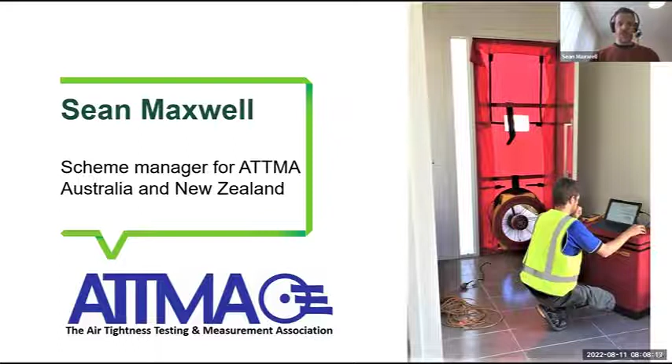ATTMA started in the UK, and now about 10 countries have joined the scheme, because they've really done a lot to sort out how air tightness testing is done systematically. So what we want to do is show you some of the things we're learning through that, and I think it'll help Australia get through some of these challenges coming.

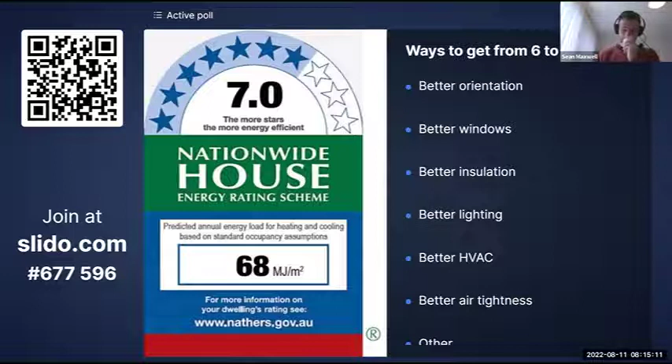Here's another quick poll. The main thing from the code for NCC 2022 is we're going from 6-star to 7-star, most likely. So what do you expect are the ways to get from 6 stars to 7 stars? Open that link on your phone, scan that code, and participate - what do you think are going to be the easiest ways to do that? Okay let's see - better orientation, air tightness, better insulation, better windows.

Interesting, better HVAC is also one. HVAC is going to be a more important way of doing things in the future, because we're going from basically the current framework, which is pretty much fabric-only approaches to energy efficiency for the NatHERS rating, to including HVAC as one of the whole-of-home components. So most of you think more insulation, better orientation, better air tightness - those would be the ways you get from 6 stars to 7 stars.

So some of the changes planned for NCC 2022, like I said, going from 6 stars to 7 stars, it's just a general increase in stringency for air tightness, or for energy efficiency. But there's also some stuff in there related to condensation - bits about when you're now going to need ventilation. If you build more airtight, you need ventilation. And there's changes to the materials you're allowed to use.

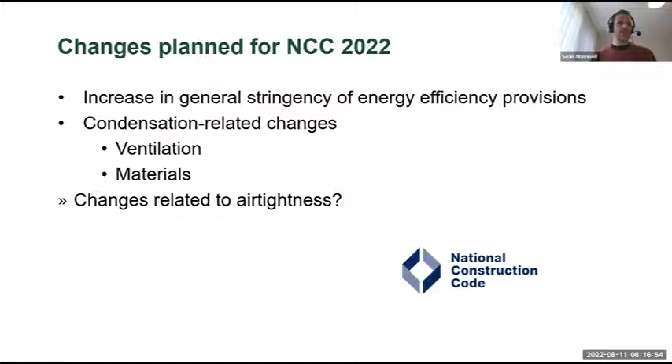So are there changes related to air tightness? Well, some of you said to get from 6 stars to 7 stars you're going to use better air tightness. Well, not yet really, because in NCC 2022 there really isn't anything in there about air tightness. But that's not to say that stuff isn't happening - I find this totally tantalizing prospect of using air tightness in your energy model to reflect how you build.

So the software you use to do a NatHERS rating currently just uses some defaults in there about how you build for air tightness. They'd say you've got a bunch of downlights and they're close fitting or well sealed, stuff like that - checkboxes of yes, it's been sealed or not, or it will be sealed. And that generates a default of maybe around 10 air changes per hour, or 10 cubic meters per hour per square meter. Using those defaults gets you to around 6 stars for a typical rating.

But if you were able to change those assumptions - like a lot of you, if you've done blower door tests before, you'll know it's not that hard to get from 10 down to, I regularly get down to 5s, say. If you do that, you're going to get almost half a star better performance that you actually can't claim credit for right now, because NatHERS doesn't take air tightness directly into account. So this is something that the Department of - actually, I'm not sure what they renamed their department now, was Department of Industry.

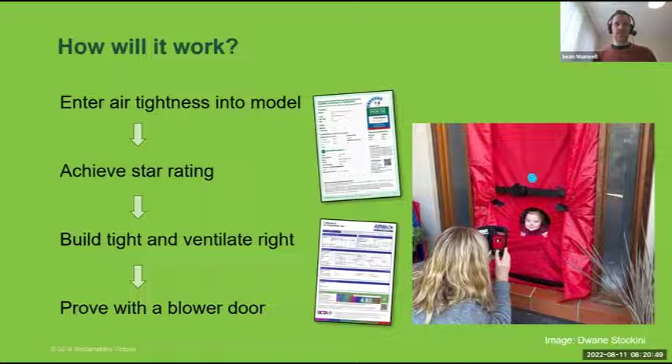I find it very exciting because as the leader of ATTMA, the Air Tightness Testing and Measurement Association, our group is made up of people who really care about building performance evaluation with a blower door. The testers who go through ATTMA accreditation are accredited - they've gone through training. The data is checked by software; when you input it into the database, it scans to make sure it actually makes sense. The testers are audited, and the market plays fair in that everyone contributes to the database. So they're all checking in all directions that things make sense.

So how will blower door test companies keep up with construction demand? The Department of Industry sees this not as something that's going to create crazy out-of-hand demand, because it's actually going to go with the number of assessments that are done this way.

Thermal bridging is a basic example - when I say thermal bridging, it's like a bridge for heat transfer to happen very quickly. How does heat get from one side of the wall to the other? If it has to go through insulation, it's going to be very slow. A thermal bridge is a bridge over or through that insulation, taking heat there very quickly. That's what thermal bridging is - it's just a thermal highway, you could say.

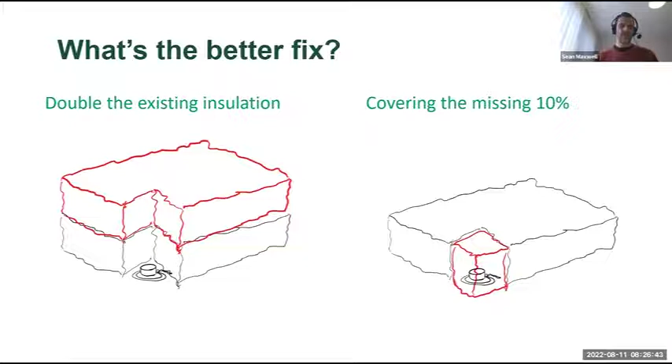So how much of a risk is that? If you're missing a bit of insulation, here's a hypothetical one. If you were to cover that missing 10% of insulation around a light fixture with insulation now, would that save more energy than doubling the thickness of all the other insulation there? If you're talking about bats of insulation, using one bag of extra insulation versus using 9 more bags to cover the existing insulation - which saves more energy?

What do you think? Real quick, let's do a poll here. What do you think is going to save more energy - covering the missing insulation so that 10% goes down to 2%, or doubling the thickness of all the insulation that's already there? What do you think saves more energy for a typical ceiling assembly? We've got 22 people eager to answer here. Awesome, so you get the point.

Missing insulation is a massive, massive penalty - that's just how the math works. I can work it out for you sometime. It's pretty crazy - insulation this thick, thicker than any insulation I've ever seen in real life around here, you could add as much as you want, and it's going to save less energy than just covering those little missing bits. So the missing bits are super important.

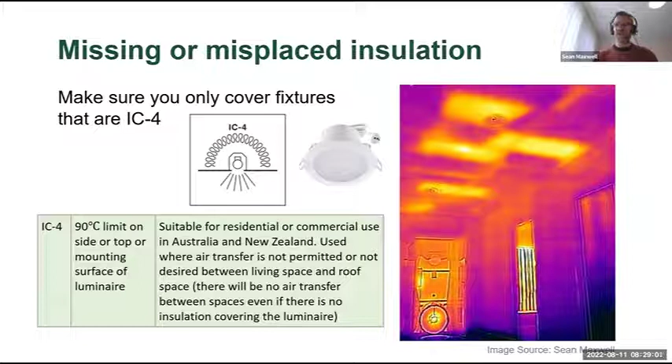That's how it should look if you do an infrared scan of your projects. Go ahead and cover them, just look on the box. This fixture here is from Bunnings. You just look at the box and it'll say what the rating is. Most fixtures these days are IC4 rated, so you can just cover them with insulation. If anyone has questions about that, I'd love to learn more about light fixture ratings, but it should be pretty simple.

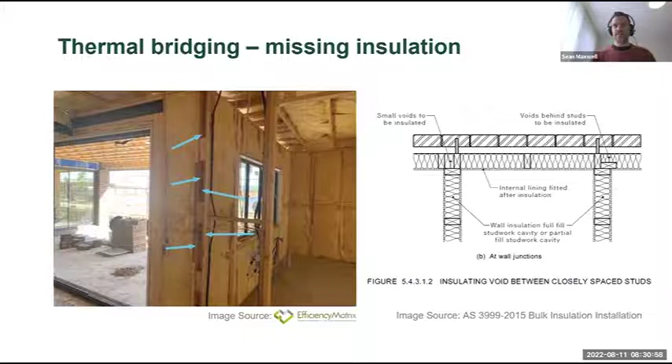All right, here's some more quick pics of missing insulation. Where the overhang comes, there's not much room to put insulation along here, but what you should do is use a high efficiency batt or a denser batt along here, around the corner. Actually, AS3999 has illustrations of how you can use high density batts along the corner, along the edge, to make up for this gap. Don't just not put insulation there, because it's going to really harm performance.

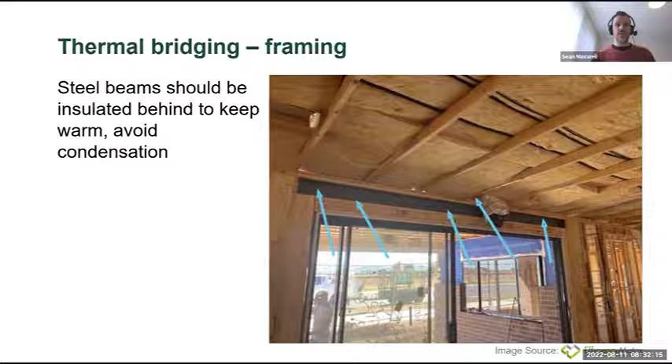Another example here is this steel beam. Steel is very, very good at transferring heat, transferring energy. So to get rid of this massive thermal bridge, this is going to light up real bright with an infrared camera. You can use even a little bit of insulation, just a thin bit of foam board insulation along there, to cut off that thermal highway from inside to outside. Some thermal bridges can be so strong that they're actually locations for condensation, especially in humid environments. So these thermal bridges really have many drawbacks. Thermal bridging doesn't just have to be metal, even timber framing has a big impact on this. This is accounted for directly in energy codes in the US, and I expect this to happen someday in Australia.

So with timber framing, when you talk about the insulation value in your wall, it's not just the value of the thickness of the insulation, it's not just R2 or R3 insulation that you're using in your wall. The timber actually is part of that assembly, it's part of the thermal performance. So just standard timber studs in a 90 millimeter wall presents a 15% loss in performance from the insulation R value—it's 15% worse than R2 insulation, for example.

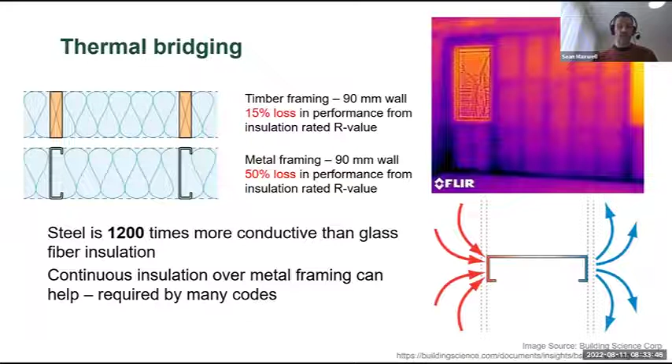Metal framing, though, is a way different story. That same wall assembly is 50% worse than the insulation R value. So if you put R2 insulation in a wall using metal studs, it actually behaves more like R1, which to me is just crazy how efficient these metal studs are at transferring heat between inside and outside—1,200 times better at transferring heat than glass fiber insulation. That's why in a lot of codes abroad, they require that if you use metal framing, you have to use some continuous insulation over it.

We don't need to go too far into different kinds of insulation available, but expect more options as time goes on. There's lots of different ways to do it. Closed cell and open cell spray foam are very widely used in the US. By far, glass fiber is still the most common insulation in the US, but they're using much more spray foam too. A combination of glass fiber and continuous board insulation like XPS on the outside is a super common assembly in the US. Expect similar stuff coming this way.

Before I get on to this, there are a couple quick questions here. What are the cost implications of a blower door test?

Generally, the market rate for a basic blower door test—for a lot of testers, if you're a builder building many homes and wanted to know how you're doing, a lot of them would give you a complimentary blower door test, for the possibility you might use them for all your future projects. So it's worth asking. But market rate would be definitely less than $500 in a mature market. I think it's common for a blower door test in the UK, where it's required by code, to be about 180 pounds or so—a couple hundred dollars, maybe $300 Australian. That's in the UK, and it's probably similar in the US.

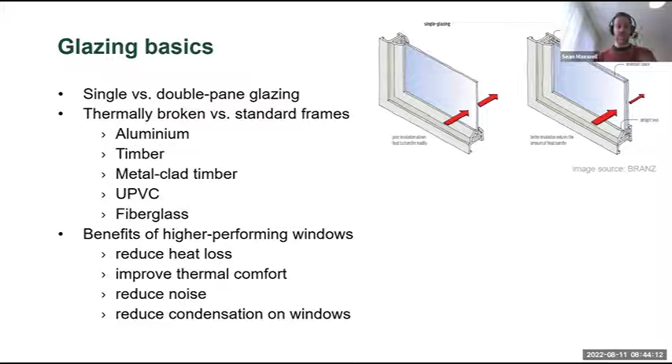Double glazing also reduces noise transfer and reduces condensation potential, and that goes for the framing as well. The better performing framing, fiberglass, UPVC, is better at avoiding condensation than aluminium, which is really a good condensation surface. It's actually sort of ironically a dehumidifier in itself because so much condensation collects on it, it dehumidifies the air. So condensation, boo.

I'll go over the main difference between that apartment and this apartment. There's a difference of 100 years in when they were constructed, but that one's single pane glazing, and this one's single pane glazing. That one is uninsulated masonry walls, and this one is uninsulated masonry walls.

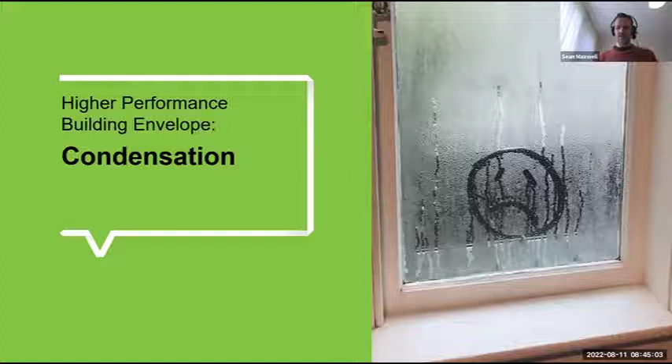Why do we get condensation in that building in Bondi where we don't get it here? Not because of the location, it's because of one very simple thing: ventilation, which I'll go over.

So, okay, wake up, do a quick poll here. What do you think? Is increasing the energy efficiency of homes also going to increase the risk of condensation? Are we in for a soggy awakening here?

So many think it will increase the energy efficiency, will increase the risk of condensation. Some think no, it's not gonna. I'd say if I were to answer this along with you, I'd say it depends. Yes, I would say it does increase the risk of condensation, but there are ways to mitigate that risk. If you use those methods of mitigating risk, it's actually not that scary. So we'll go over how to mitigate those risks.

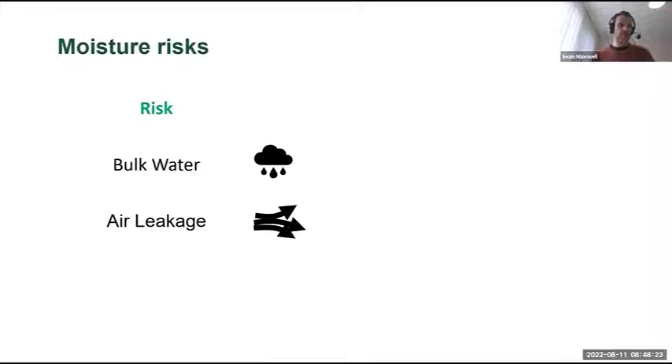So let's go over ways to mitigate these risks here. Moisture risk is the one thing that's enemy number one for buildings—it's the most basic thing. You don't want rain falling on you while you're sleeping. Bulk water is the main moisture risk. Next, air leakage is a huge moisture risk that you can take some basic steps to mitigate. And then vapor diffusion is one that the building code has started to address through materials choice. We'll go over these in terms of how they're a risk and how we mitigate that.

In terms of importance, you'd say vapor diffusion—let's just say that's a risk of one drop worth. Well, there are studies and experiments to show that air leakage can have literally 100 times more moisture transport capacity than vapor diffusion through solid materials. And bulk water, I just picked a random number here—I said yeah, it's like 1,000 times more important. Without proper bulk water management, you're 1,000 times more at risk of moisture damage.

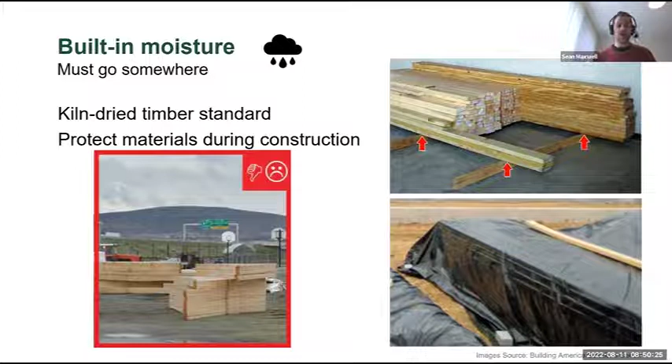The biology of mold is that it's going to start digesting your building materials, your timber, above about 19% moisture content, so it's easy to check if you have moisture in your construction. Here's a job site in Queensland that was totally unprotected from rain. I understand that will happen during construction, but if you find that there's more moisture content, rent or buy a blower once you get the roof on to dry that place out before you put linings on. In fact, it's better to do that before you put insulation in, because the insulation prevents drying. So you want to dry that timber out before you enclose it. That should be a requirement.

When I was doing a blower door test, I had my infrared camera and I pointed it at this corner and thought, ooh, look at this. What's that very cold corner over there? Why is that lighting up so dark like that? Is there a major air leak? No air leak. What was going on?

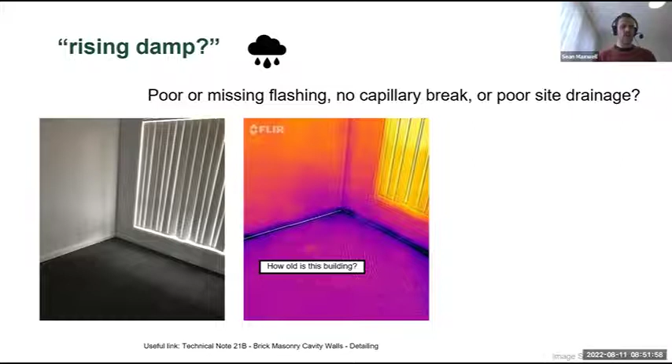I'm not saying this is rare—if you think this isn't a problem, you just aren't looking around, because this was soon after I got here in Australia, and one of the first blower door tests I did found this. It's a lot more common than you think, just some basic site drainage issue needs to be fixed to drain that out.

Brad Lawrence asks, could that also be an air leak? I confirmed it indeed was not an air leak because I went around and felt—there was no air leak. It's just the soaking from site drainage. There's lots more pictures of this site showing evidence of silting and everything. So after a heavy rainstorm, water piles up there and soaks the bottom plate. Not a good idea. Not a good scene.

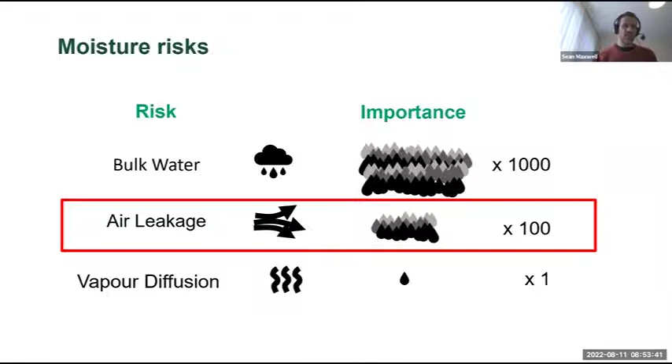So if you think air leakage is going to help dry your building out, it can often do the opposite. This is sort of an extreme example here, but it will prove the point.

Here's a swimming pool that had a very expensive HVAC system they just couldn't get to work right—couldn't get the target humidity in the aquatic center where it needed to be. They did a blower door test. You can see the guy here wiping sweat from his forehead. It was so humid in there, there was condensation on these nice double pane windows here in the Melbourne area.

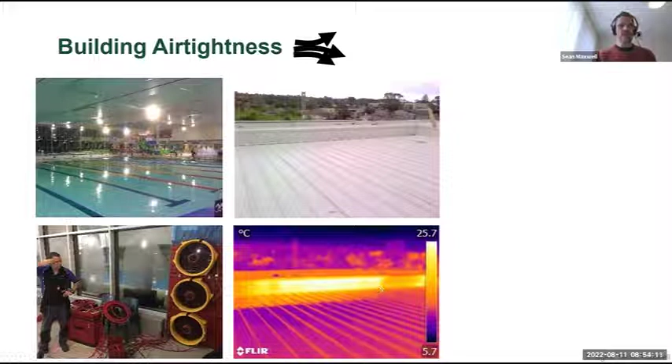And there's basically no insulation in here—no insulation and very poor air sealing. So there's tons of air leakage coming through from below, going up into this parapet assembly and causing major condensation. They're also using the wrong materials here—this is a vapor permeable wrap in this assembly, which is not the right place to be using it, and it wasn't even sticking well. Not a good scene at all.

There's just literally buckets of condensation happening in this roof parapet, and this place is only a year old and it's already getting mold and mildew in it. There shouldn't be anything in there. The food source for this is just the dust that blows in from around, and with enough moisture, the fungus starts eating it. So air leakage is the source of this water vapor. Air leakage can carry major moisture risk, not just for a swimming pool, but for your own buildings as well.

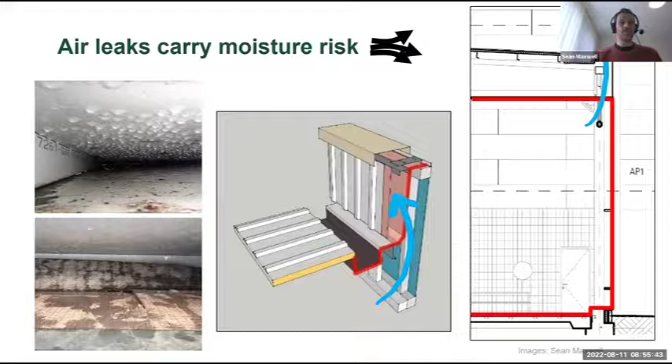Totally fine, but to avoid mold in your walls, you need to make sure there's plenty of pressure relief. These force humid air down into the building, and that needs a free path out. You don't want that humid air going into your wall assemblies, because it can collect there and cause major damage. So pressure relief by design, and then absolutely attend education about that. They can't be lazy about it. They really do have to do it like it's designed. They need to open the windows so it has a place to go, not into the walls.

In this case, it should be a code requirement. If you use evaporative coolers, you have to seal the heck out of the walls so that moisture can't get into the walls. You want it going out the windows, straight outside, provide that cooling and go outside, not collecting in your walls. So airtightness in this case would be a very good thing.

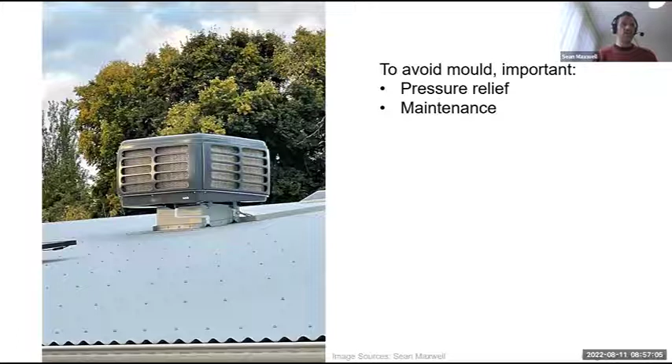If you're going to play with water, know that it can soak you. Here's another bit about air leakage, energy, and comfort.

Most evaporative coolers get fitted with gravity dampers. They just force open under air pressure, and then they fall closed by gravity. But motorized dampers are required in the building code in the US, and hint, hint, will be required here in Australia someday, so that if you use an evaporative cooler, it needs a motorized damper to force it closed, so there's not just gushing energy throughout the year. Every time the wind blows, those things can flap open and waste lots of energy. So a motorized damper should be required by building code.

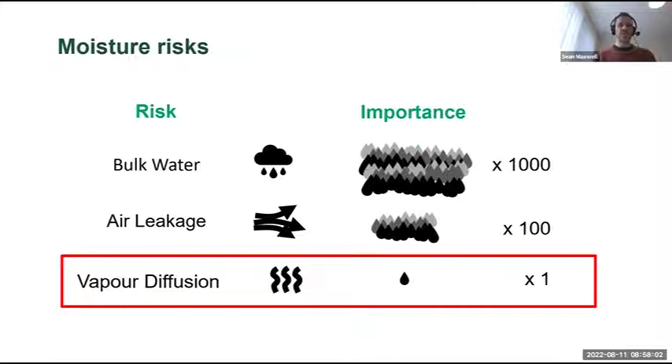So for building code, there's a standard for this. It's called AS 4200.1, and that has a classification for these materials: class 1, class 2, class 3, class 4. Class 3 and class 4 are permeable, class 1 or 2 are impermeable. So you can make something semi-permeable or impermeable. You can make it more permeable by poking little holes in it.

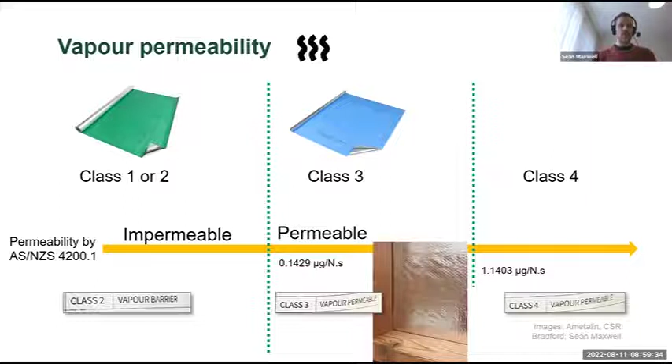If you look real close here, you can see little holes poked in the membrane by the manufacturing process. That's how they make it more permeable, they poke holes into it. So when you poke holes into this foil membrane, it lets a little more water vapor out. That's one way of achieving that end.

The other way of doing it is by making a fabric material. This is basically how the rest of the world does this, using a material that lets water vapor pass through it. It doesn't have to be a new plastic thing. In the US, it was very common to use building paper, which is a paper impregnated with asphalt, and that actually lets water vapor molecules pass through, much like a Gore-Tex jacket for your house.

So these metrics here are in micrograms per Newton second. I know you all think of it in those terms, but luckily it says on the membrane packaging what class it is, class 3 or class 4 for vapor permeable.

Let's talk about how this matters for you. NCC 2019 says in climate zones 6, 7, and 8, which include Melbourne, you need a class 3 or class 4 membrane, meaning vapor permeable.

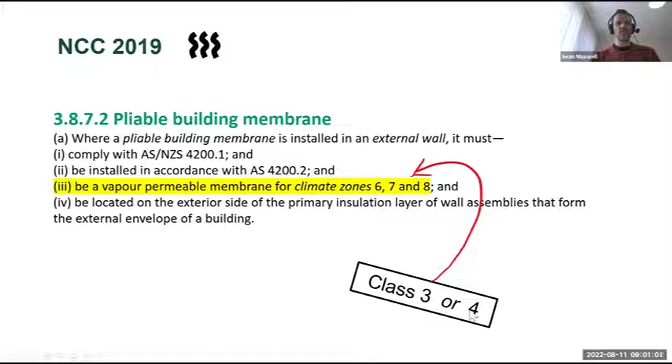Now, remember I said codes creep? We start with class 3 or class 4 allowed in climate zones 6, 7, and 8. In 2022, it says for climate zones 6, 7, and 8, now you can only use class 4, you can't use class 3 in those climate zones anymore. So that foil membrane with holes poked in it, you can't use it in climate zones 6, 7, and 8.

So in climate zones 4 and 5, you can use a class 3 membrane. Can you use a class 4? Yes, it needs to be at least as permeable as class 3, and class 4 is more permeable. So starting in NCC 2022, wraps have to be more permeable and in more climate zones.

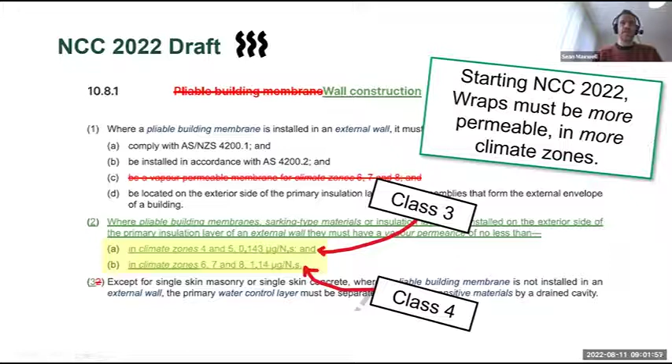So remember I said codes creep? Know that these sorts of requirements are coming, and they're just going to get more widespread over time, because that's the way the science should lead us, and that's how it's going to go long term.

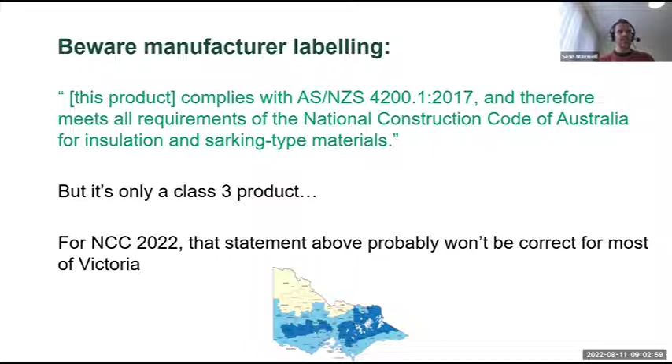So sometimes you'll see material packaging that says stuff like this: this product complies with AS 4200.1 and therefore meets all requirements of the National Construction Code of Australia for insulation and sarking type materials. But if it's only a class 3 product, that means that for most of Victoria, it's not actually going to be allowed. So even though it says it on the package, you've got to check the labels.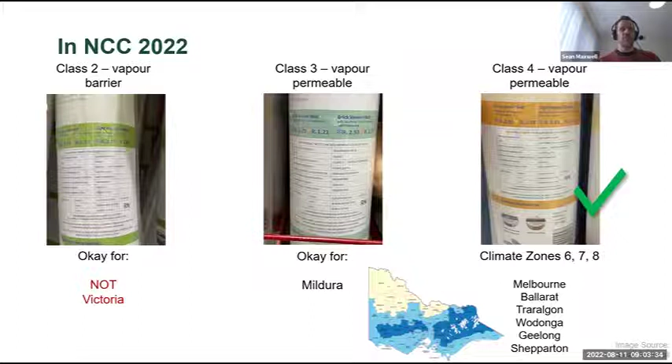So just looking on the shelf in Bunnings, you can see they have some class 2 ones, class 3 ones, class 4 ones. So some of them are going to be usable in most of Victoria and some are not. So check the classification.

Here's the shelf in Bunnings where there's some class 4 membranes there. All these requirements I'm talking about here are for wall membranes, not ceiling membranes. You can see in this picture, this one's wrapped on the wall, this one's wrapped in the ceiling. So can you buy these? Absolutely. Could you use them in a roof? Absolutely, if it's class 2 or class 3, yes. Those requirements I'm talking to you about are for walls only.

So here's a quick quiz for NCC 2022. Where in Victoria is it okay to use a class 1 or class 2 standard foil sarking in the walls of a home? Where can you use a class 1 or class 2 membrane? 2 smart people, 4 smart people, 7 smart people, 10. All right, so most of you have the right idea.

Class 1 or class 2, one that says impermeable or vapor barrier on that label, nowhere in the state of Victoria can you use one of those foils in the walls of a home. Nowhere in Victoria. In Mildura, that's climate zone 5, I think, you can use a class 3, it's still got to be permeable, but it can't be a class 1 or class 2 standard foil. So nowhere in Victoria can you use a class 1 or class 2 in the walls of a home for NCC 2022. Know that. Don't get stung by this, because if someone's looking and you've used the wrong thing, they might make you take it off.

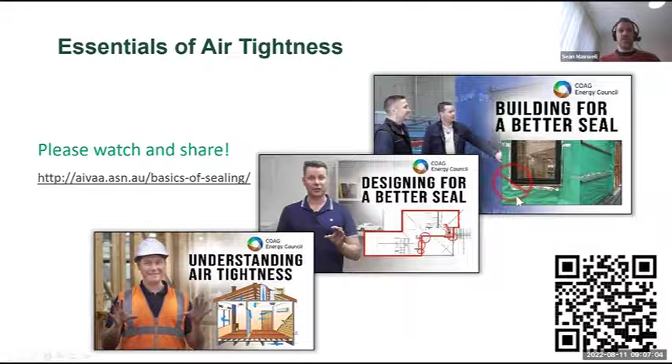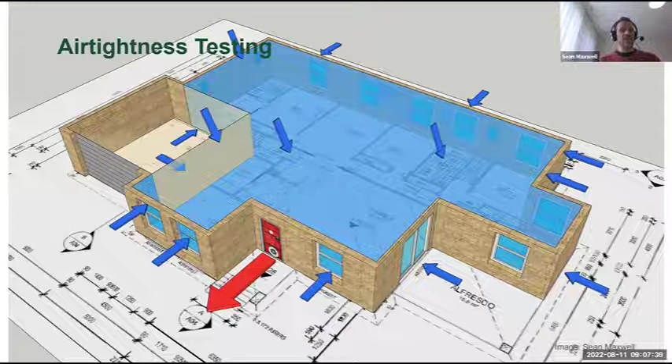Just for the walls. Okay, so when you do an airtightness test, what does it mean? Let's do an imaginary one right here. We put the blower door in the front door, sucks on the house and puts a negative pressure there, and air leaks in to replace that air that's going out from the blower door. That's how a blower door does it. It treats all leaks equally, same pressure across the whole house.

Anyone take a guess what parts of the building are actually tested by a blower door? Is it testing the walls, the doors, the windows, the ceiling, the floors? Is it testing the airtightness of the plumbing or the lights or the wall bordering the garage? Please take some guesses here. What do you think? What are we testing here?

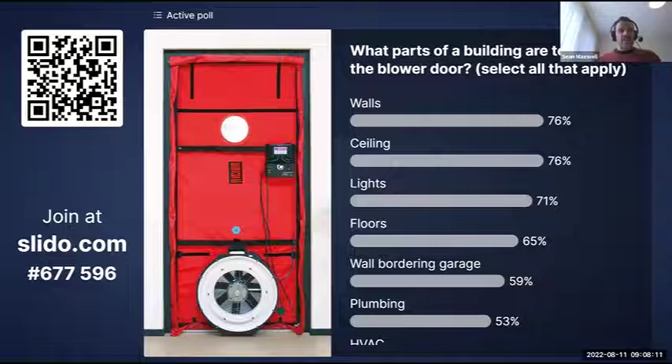So fewer of you think that plumbing is actually being tested, and maybe the wording should be more precise. The plumbing itself is not usually being tested for airtightness, but definitely the plumbing penetrations are. Same thing with - well, actually not the same with HVAC. I'll go over this point in a second. So thanks for these answers.

Yes, absolutely, walls and ceiling, those are the things obviously we think of first with a blower door. The floors, maybe less, but yes, indeed, the floors can leak. Do it on an existing building, on timber piers, and you'll see the floor itself leaks. It's like the stuff for horror movies - if you use a fog machine under a house, you'll see the fog leaking up through the floorboards. It's so cool. So floors can leak, absolutely. The wall bordering the garage, if it leaks, it's going to measure it, man, and you'll see that. And it's not good smells coming from the garage.

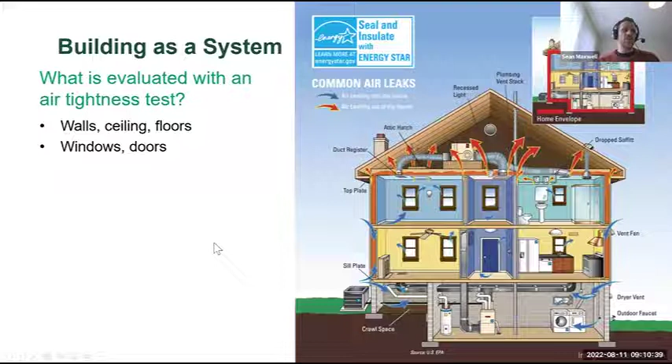So other things you might not think of, like stuff that's in the basement, it leaks into the basement, and then from the basement leaks up into the house and then out through the ceiling. You have to think of a house as a system. So yes, the walls, ceilings, and floors are leaking and going to be measured, obviously, so are the doors and windows, but plumbing penetrations, electrical penetrations, and separations from the garage, the basement - those are leakage surfaces, leakage boundaries that get evaluated with the blower door. And the HVAC itself leaks.

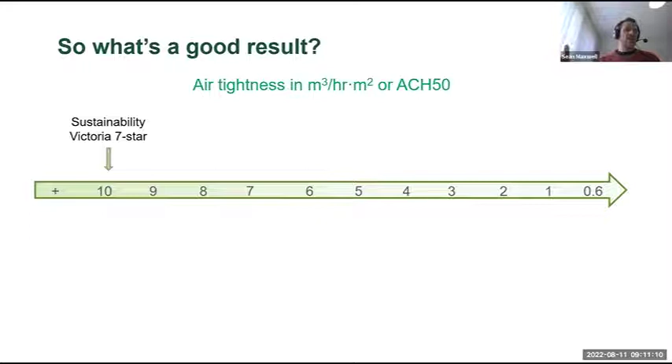So when we're talking about airtightness, what is a good result? Let's talk numbers for a second here. Sustainability Victoria says for the 7-star homes program, you need to get an airtightness of 10 or better - lower is better, so 10 or less is required. In their zero net carbon homes program, they said you need to get to 6 or less, and all of them that went through that got to that level. So where does the number 10 come from? Well, in NCC 2019, if you use a blower door to prove that you comply with the building code, you have to get less than 10 to prove that you comply.

Green Star Homes is a recently released standard for better than code homes. They say in climate zones 1, 2, 3, 4, and 6, you need 7 or less, and in climate zones 5, 7, and 8, you need 5 or less. So 5 is twice as good as 10.

But is that actually difficult in the grand scheme of things? US climate codes for all climates similar to Victoria's require you to get to 3 or less. And I hear from my little code birdie that in the US it's very likely in their next code revision to go down to 2 or less. That's building code - that means you can't get your certificate of occupancy unless you get to 2 or less.

So that tells you two things. First, is it that hard? Probably not, because if it were too hard, the building industry would rebel. It's not that hard. Second, the risks of doing that aren't that much - they wouldn't require it in the building code. Building code is basically a risk reduction rule book, so they wouldn't require it if it were that risky. There must not be anything that bad about getting down to 2.

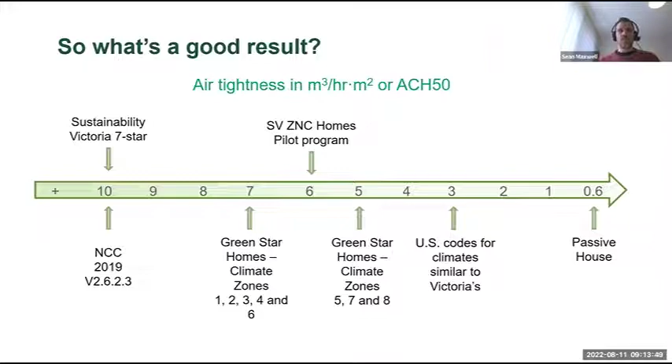I'm just curious, have any of you seen a blower door test before? Real quick, just let me know - have you seen one of these before? And if you saw it, was it tight, or did you see when it was very leaky? New construction, existing buildings - if you've seen both tight ones and leaky ones, you can answer twice.

So most of you haven't seen one of these before. My advice is to get one done on your next project, because there are opportunities in the future for this - it's probably going to be in the building code in the future. It's a good idea to get to know as soon as possible the easiest things you can do to get better. It doesn't cost that much, doesn't hurt that much - it's just better to know.

It's like stepping on the scale every once in a while to know how much you weigh, just to get an idea. So most of you haven't seen one yet, but I expect that in a few years that number will flip.

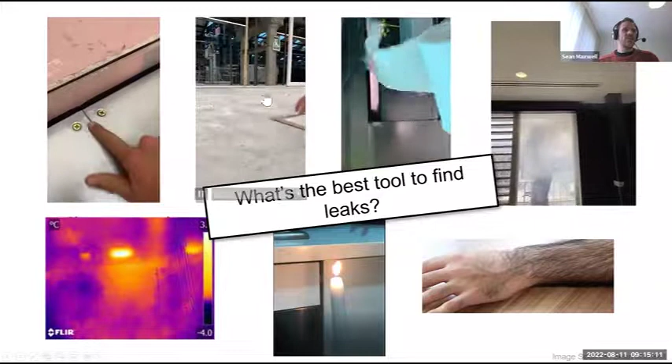So when you see a blower door test, you turn yourself into a leak detective. It's pretty fun - you can use all sorts of things, like soap bubbles on the left here, or plastic bags. The shittiest of buildings use single ply toilet paper - here, the leaks are so big that toilet paper just gets sucked into these holes. It's kind of crazy.

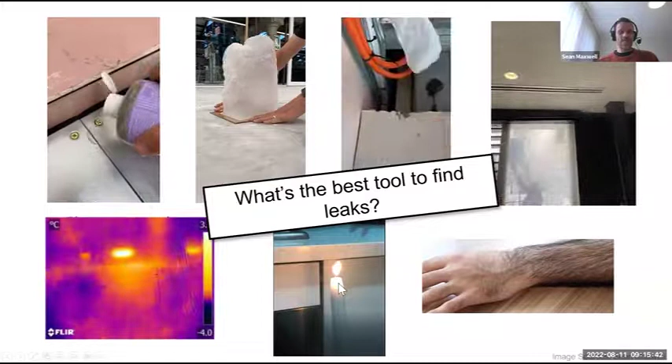You can also use fog to pretty dramatic effect. Infrared cameras along with the blower door are the perfect combo - either one alone won't tell you much, but the combination is really powerful. Yes, you can use candles, but I wouldn't - fire safety risk. And if you have a guy named Harry on your job site, you can ask for his arm, and that's a really good leak detection tool. So is little whiskers on your chin.

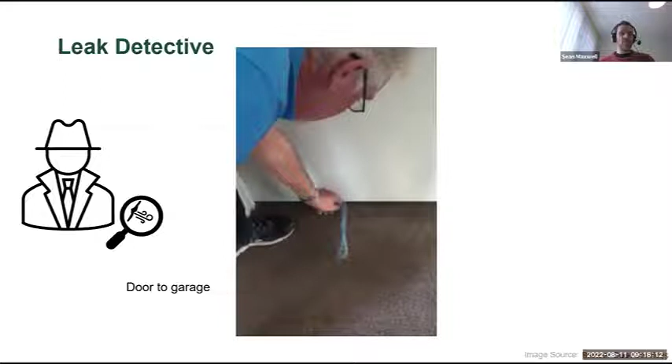So you turn yourself into a leak detective with whatever you have at hand - just a scrap of paper or a scrap of plastic bag. Take this door to the garage - you might not think of that as outside because it's covered and will never get wet, but that's a major leakage pathway that building code requires you to seal. So that's a missing air sealing accessory there, like a missing door seal. You can start to get a handle on what's causing you the most grief.

When we're talking about this, I'll talk about wall air barriers, floor air barriers, and ceiling air barriers - an air barrier assembly. I'll try to refrain from too much terminology here, but with a blower door, it's really eye-opening when you see this for the first time. You turn yourself into a leak detective - you walk around, you can feel with your own hands what's leaking, what's not, what works and what doesn't.

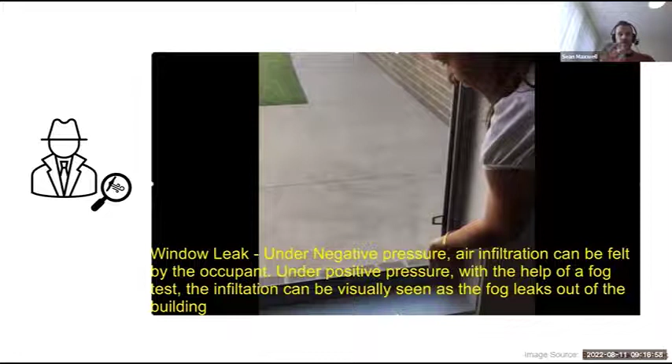Here under negative pressure, they're sucking air and can feel it sucking in around these windows. You can shoot fog at this window and see the fog creeping out through the window itself. In this case, this is a poor window component - the window itself is doing the leaking. There's a seal along here to the brick, so that's not leaking. It's the window itself, a poor component through your window assembly, or through your wall assembly.

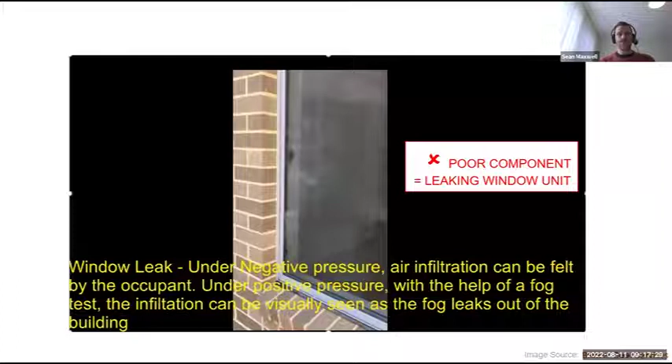But here, there's caulk on the left, no caulk on the right. And the tester said, oh geez, look at this. Tells me that's a lazy builder here.

But the builder said, well technically, the building code says that if the gap is less than 3 millimeters, that's close fitting and you don't need to use caulk. Well, you could call that builder either lazy or crafty. But they might be right.

Maybe they don't need caulk there, but is that why there's fog leaking out through here? Is that the problem, that there's no caulk there? I'd say no. If you see with the blower door, there's fog leaking out of this gap here, between the window and the brick. Why is that happening?

Well, it's because if you go back in time, you'd look behind this and there's no wall sarking there at all. So it's absolutely possible to build a wall without sarking. But brick itself is not airtight. It's never going to be airtight. One of the beautiful things about it is that it can basically dry out, and it's quite permeable to air, and so are all the mortar joints.

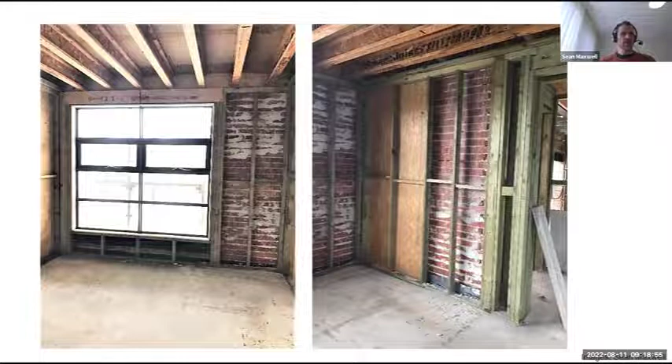So this is what a house like that looks like from the inside. If you were to take this wall assembly before you put the bricks up and put some basic sarking there, that becomes a basic wall air barrier assembly. An air barrier assembly is the materials like the sarking, then the accessories like the tapes, and the components like the window. Those are all the bits. To make it into a complete wall air barrier assembly, you seal it at the wall bottom plate. For a single story building, this is basic wall air barrier.

To get from 10 to 5, do this: use your sarking, tape the sarking well, tape it at every successive course, tape it at all the penetrations, seal it at the top plate and the bottom plate. Then whether you include brick or no brick, it's not going to matter. If there's caulking or no caulking, it's not going to matter, because the air is going to get stopped before it even gets to that joint. That is an effective wall air barrier assembly.

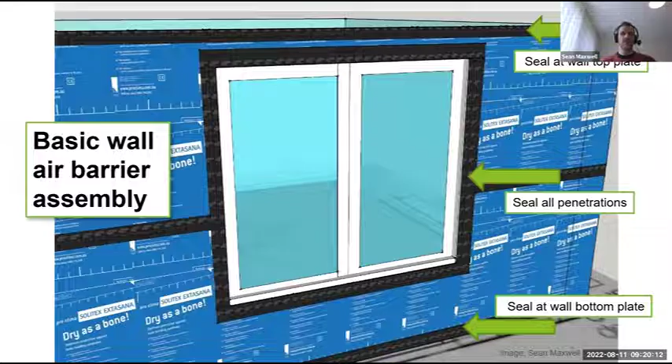Just watch some YouTube about walls. It's basically been standard practice in the rest of the world for 20, 30 years. So, it's not that hard to do this really well.

I'll plug this installation guide from ProClima. It's a really good procedure for how you get good tension on your wall membranes to make them really solid and get a good seal with very basic and cheap processes. So using caulk along the bottom plate here, and then a stapling pattern: staple at the start and finish of this run of sarking, pull tension, staple, and then pull tension down towards the bottom, staple, pull, and these corners, staple, and then staple again along each stud. You'll get a really solid, strong membrane that you can then use good quality tape on that will stick forever.

Here's how to detail some basic detailing around the windowsill. All this stuff is super basic and not that hard to do. So that's a good free guide that's available, and there's tons more like it.

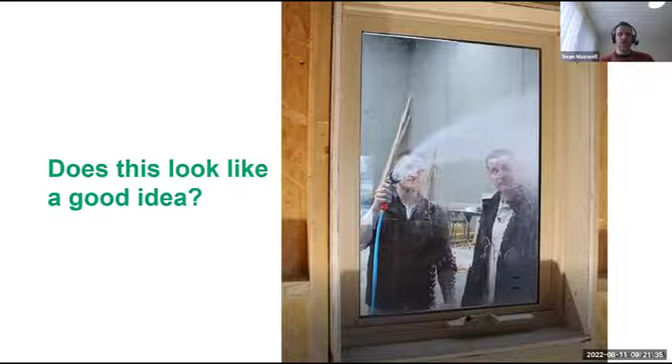I would also suggest when you do a blower door test, if you're looking to see how well you're doing, do what this guy's doing. Does it look like a good idea? He's spraying water at his wall. What's going on? Oh, this is one of those videos we did.

So spraying at this wall assembly here, which is a very typical detail where the sarking is just cut flush with the edge of the rough opening, and then you spray it with water and a light breeze and it just gushes in. With the video, you can see the water pouring in. That's what will happen during a decent rainstorm. You get water just pouring into the wall.

The more insulation you add, the slower that's going to dry out. And when I said that's typical, if you didn't believe me, there's just lots of pictures to prove it. This is just absolutely standard practice.

By the way, this particular house got a permeability of 5. I'm not saying that's good, but some basic stuff you can do will get you there. Actually, I shouldn't have even told you that, because you'll think this is adequate. This is early in construction, they're not done yet, and some things here I'd say are not good.

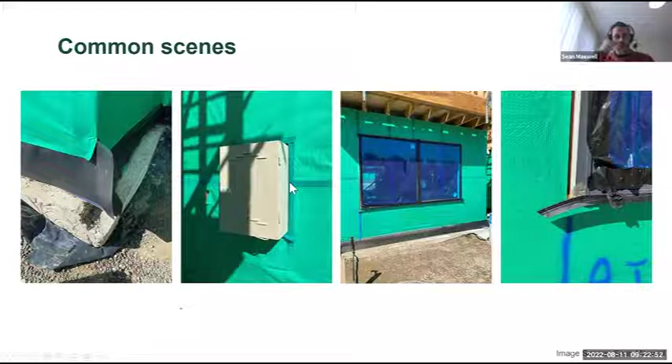This is the cheapest tape ever, apparently. Even after a couple days of installation, it's already peeling off. No sealing along the bottom plate here, sealing from the wall sarking to the damp-proof course - it's not sealed. There's lots of things that are pretty much as bad as you can get.

Not good. So even AS 4200.2, the membrane standard, has a basic installation process for installing sarking to make a more weatherproof wall enclosure, and to get the connection between the window component and the wall assembly, you do this. Use some basic sarking, flashing procedure here. Like I said, this is not rocket science, it's building science.

Here's some basic procedure to seal that window component to the wall assembly. You spray that with water at high pressure and you just won't get water coming through. That's what you want your house to do - not get wet. So some pretty basic things, not that hard.

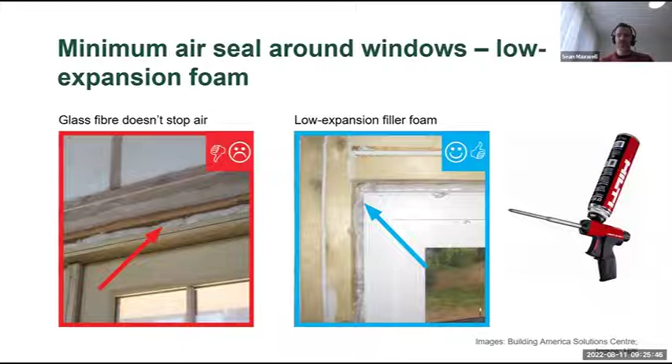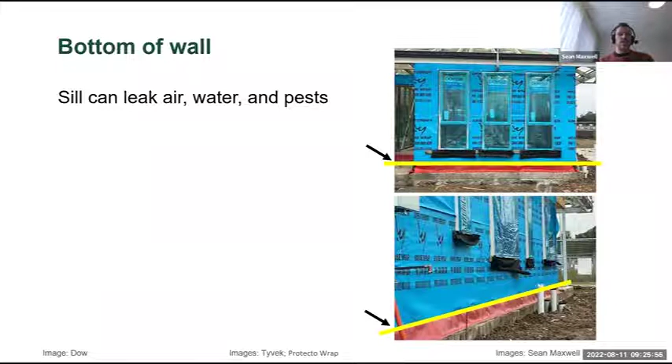At the bottom of the wall, seal the wall membrane to the damp-proof course. Here's an example - this is from the US, where they're using rigid sarking like plywood OSB sheathing. But you can just tape the wall plate to the damp-proof course, and then tape your membrane to the damp-proof course as well.

Another cheap one we need in this country is something like Dow Sill Seal, which is just a roll of foam that you roll out. It's like $50 to $100 for two rolls, and this will do your whole house - you run this around the perimeter and set your bottom plates on top of it. That squeezes the foam bit and makes a perfectly adequate capillary break so it's not going to soak water up, and makes a basic air seal along the bottom plate. Then you tape your wall membrane to the bottom plate, air seal along the bottom, done.

So someone asks, are polyester batts suitable in lieu of expanding foam around windows? Definitely not. Polyester fiberglass just doesn't stop air movement - it's about as effective as an air filter as a cigarette filter. It just does not stop air movement at all. I've got pictures to prove it, I'll show you some in a minute.

All right, ceiling air barrier. To get your wall air barrier to connect to the ceiling air barrier in passive house, you would use a special membrane along the ceiling to provide an air barrier. In fact, in building codes in the US, for example, you're supposed to use a vapor barrier in a lot of the colder climates to prevent indoor air from getting up into the roof space. Here, it's not required yet.

But you could do this with just plasterboard. So what's the problem here? This is from a blower door test - there's air leaking from this window, from this cabinet over the range hood. From the cabinet, not the range hood itself. If it was the range hood, you'd say maybe there's a missing backdraft damper, a non-return damper on this range hood termination, but that's not what's leaking in this picture.

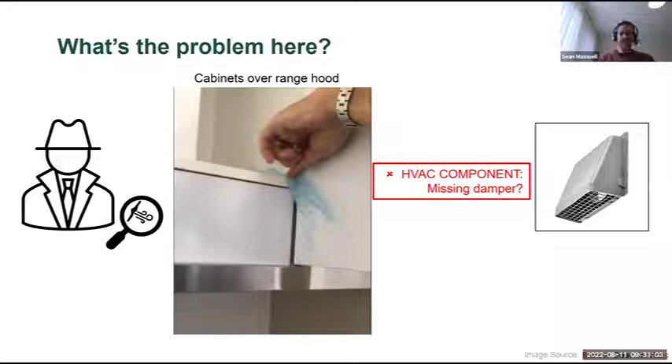It's the cabinet itself. When they shoot fog with the blower door running, they had one person up in the roof space, and they say there's fog leaking up from here - there's the duct for the range hood going out. What's missing is there's no ceiling air barrier assembly keeping that fog, or steam from cooking pasta, or fog from the blower door fog machine, from getting up into the ceiling space, into the roof space. There's no ceiling air barrier installed there.

How do you fix that? It's a very common situation. You can do it pretty cheap and simple - make a ceiling air barrier where there was none before with cheap and readily available materials. So let's go over some examples.

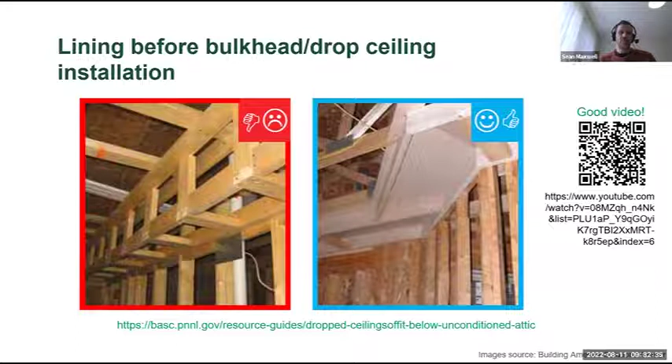Again, Building America Solution Center has lots of free resources, lots of pictures of bad, sad face and happy, good face. So we've got plasterboard installed here before the framing for this dropped soffit - plasterboard installed above that, then the framing installed underneath and screwed through it. So a cheap, already available material like plasterboard can cancel this problem. It's just not a problem anymore with something as cheap as plasterboard.

There's lots of examples of what you can use - building wrap, you could use a length of extra building wrap lying around and tape that over this soffit before you put it up. Plasterboard, OSB, plywood, thin plywood, foam board - there's lots of things to just block this off. And then whatever business you have going on down here, it doesn't matter.

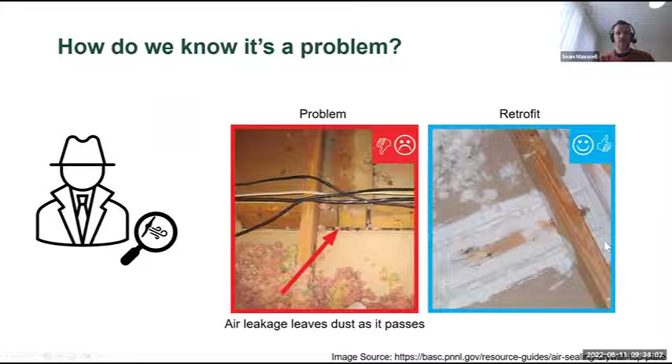This top plate, again, dirty fiberglass telling the tale of air movement over time. Air leakage leaves the dust as it passes. And then to fix that, you just hit that top plate with a spray foam gun. There's a guy trying to creep out of the picture over there - the poor guy in the suit who brushes the fiberglass away, does the air sealing along the top.

This should be absolutely standard before you add insulation for a retrofit. Air seal first. It's required in the weatherization program in the US - required to seal before you insulate, because otherwise humid air from inside can carry that humidity up to the roof space and leave it there.

Again, totally sealing the ceiling is just totally standard practice, should be here too. So sealing along the top plates is your weak point, because there's lots of joints going on between the top plate and plasterboard. Plasterboard itself is very airtight, but where it joins the top plate is not.

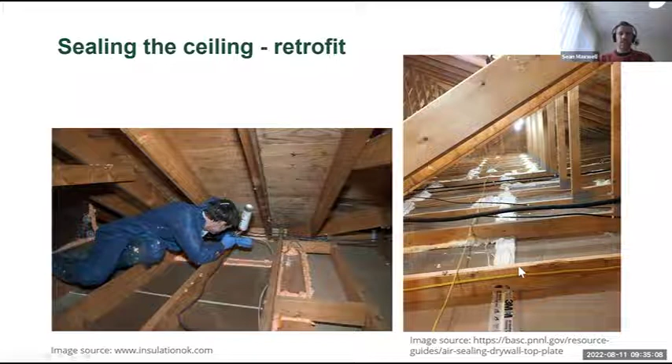So dealing with it on a retrofit situation is how you deal with it. For new construction, your wall air barrier joins the ceiling air barrier. If your ceiling air barrier is your plasterboard, wall air barrier joins at the top plate here.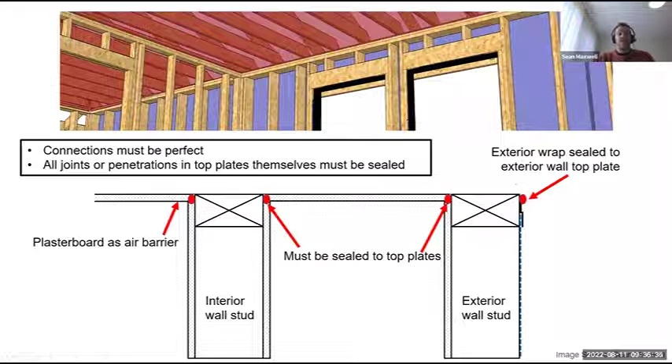So all these connections - the wall is connected to the top plate, which is connected to the ceiling plasterboard - and the ceiling plasterboard can be a pretty decent air barrier. Again, this is going to get you from 10 to 5 for sure. This sort of stuff has very, very little cost.

So to make that wall connect to the top plate, you can do it a couple different ways. Put a bead of sealant before you put your plasterboard up - that cuts off any air leakage from this wall cavity into the top plate if the top plate is continuous. And if you had a butt joint between two bits of top plate, hit that joint with a bead of sealant at the joint, like along here.

Here's another application for that Dow sill seal. They drape this over the top plate. And then from below, you put the plasterboard up underneath that, and that presses against the sill seal and makes a decent, cheap ceiling air barrier - wall connected to ceiling, and ceiling connected to ceiling, et cetera. So this is a cheap way of doing this.

Make a continuous ceiling air barrier. Basically, the air barrier here is plasterboard and foam strip throughout the whole house.

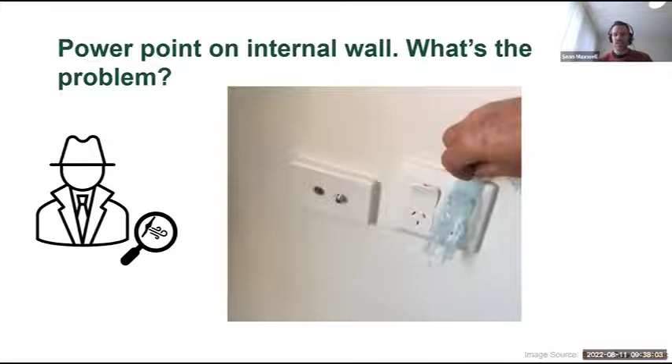So during your first blower door test, being a budding leak detective, you use a bit of plastic to say, why are the power points leaking? We're in the middle of the house - this is not anywhere near the outside. I thought we were testing exterior air tightness. Why is that leaking?

If you look from above, all the ceiling light fixtures are obviously leakage points into the living space below, but the top plates themselves can be leakage points as well. Everywhere that services penetrate through the top plate down into the wall serves those power points with air leakage. Dealing with this is pretty easy with caulk or expanding foam. Just walk around, hit each one you can find with the foam gun, and in 20 minutes you can be done with that problem.

Another good video here about top plate sealing.

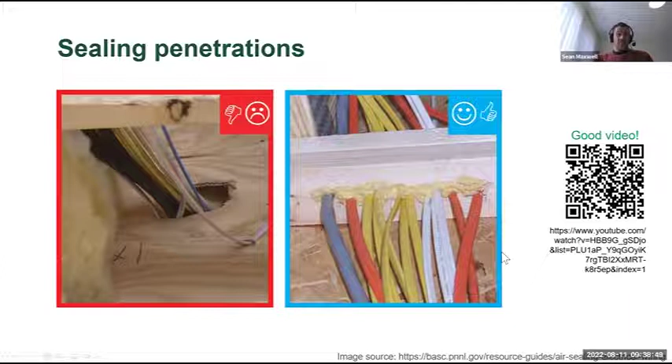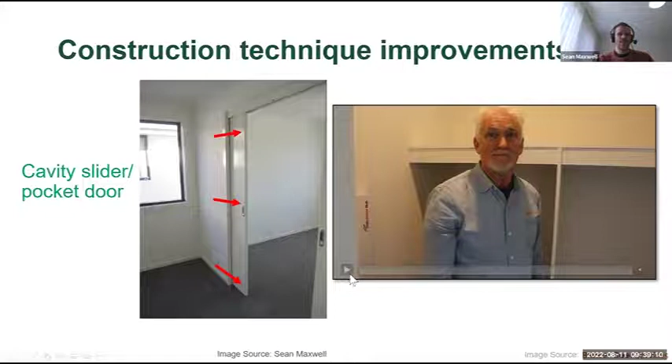Here's another one, a special, especially fun, annoying problem. This cavity slider had so much leakage that during a blower door test, air leakage coming from this crack was pushing the door out of the pocket. Insane amounts leaking here. Check it out, it's just screaming out.

So how do you deal with this? Still working... oh my goodness, my phone is talking to me.

Taking this video from Bunnings Hume Doors, which distributes through Bunnings, how are you going to make this effective and stop that problem? It's easy. With a bit of caulk around that enclosure, along this dotted line, put a fat bead of caulk there before the plasterboard is installed, or a compressed foam gasket along here. That makes that into a little sealed box, so anything that goes on here doesn't make it up into the ceiling space.

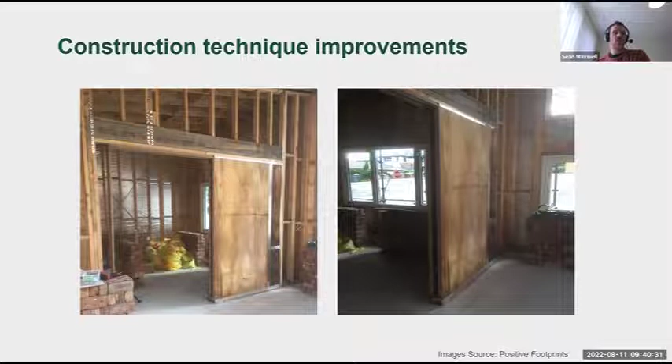Here's from Positive Footprints, some images of how they've done it on a past project. They just enclose the sliding door, the cavity slider, with a bit of thin plasterboard. You could use some extra vapor permeable wall sarking there too. There are lots of things you could use to cut that leakage off before it gets up into the roof space. Doesn't have to be that difficult.

These videos are funded by Sustainability Victoria, and they're really sensible ways of dealing with basic everyday problems - using plasterboard at the ceiling for your air barrier, using a compressed foam gasket along a cavity slider. Basic things, not that difficult. Just check out Sustainability Victoria's website, ask Grady for the link, or Google on YouTube Sustainability Victoria and you'll find it. Really great videos about essentials for making an air barrier at your ceiling with almost no extra cost.

Using expanding foam around doors and windows - you can see light coming in here. That light's going to go away as soon as the foam is added around this enclosure, around this opening. Not that difficult, easy stuff.

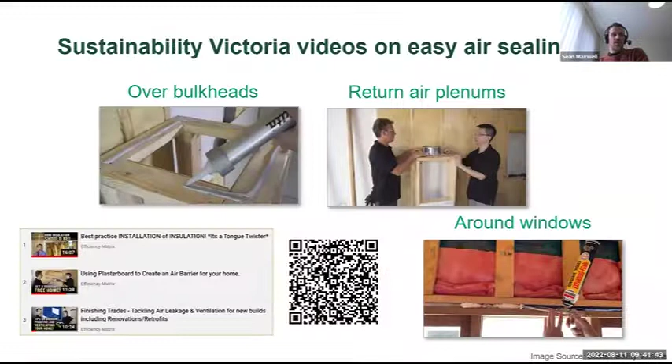Now, once you get all the stuff I've been talking about here, it's pretty much for single story construction. For double story construction or higher, it gets a little bit more work, but again, some basic stuff.

I walked out here at this house under construction, looked up and thought, oh geez, look at that. If you were an air leak, you could just travel right through the insulation, stealing its heat, and into the living space, feeding the power points and wall skirting in the room above - just make it totally leaky.

So how do you fix that? Easy. That air leakage is coming through there now, but just cut to fit - do a better job than I did with my little computer cursor here. Cut some foam board to fit that gap, then seal around it with spray foam. Maybe it would take half an hour for someone to cut these bits of foam board and hit that with a foam gun. Problem canceled.

The sarking installation here leaves something to be desired, but that can be improved as well. At least these big gaps here can be made a non-issue pretty cheap and easy. You could use foam board, plasterboard, or lots of things, anything that's going to stay there durably long term. Cheap ways to get that extra half star for very little cost.

Use a good membrane wall wrap on the exterior, good quality, one that's going to last - I'd recommend one that will hold up against long-term UV exposure and long-term temperature stresses. So use a good quality one.

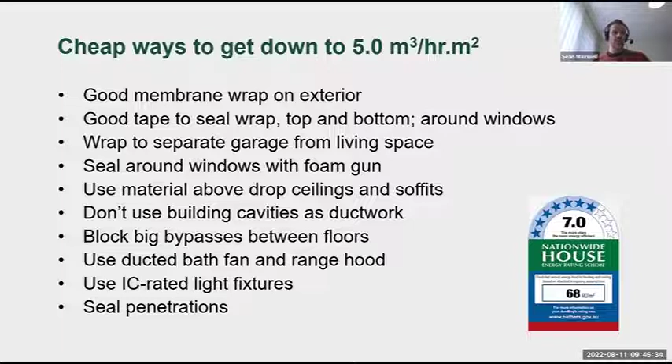Use a ducted bath fan—this is in NCC 2022 already. Use a ducted bath fan and range hood, and have a good draft stopper at the end of those. Use IC rated light fixtures; should be standard already, but just check the label to make sure it's IC4 rated, and then seal every penetration you see, and you'll be sweet.

So we talked about build tight. Let's do a real quick recap on ventilate right. Holy cow, I'm going way over time here.

All right, what kind of ventilation do you use in your projects? You can answer this if you want, but I'm going to skip it in the interest of time here.

For different types of ventilation systems, we can talk about balanced and unbalanced ventilation—exhaust dominant and supply dominant ventilation, which push air in or pull air out only. Those are unbalanced. Balanced ventilation is like an HRV, where you take equal parts of air in and push them out: 100 liters in, 100 liters out, that's balanced. Supply pushes 100 liters in; exhaust pulls 100 liters out and isn't directly replaced by air. So where does that air come from?

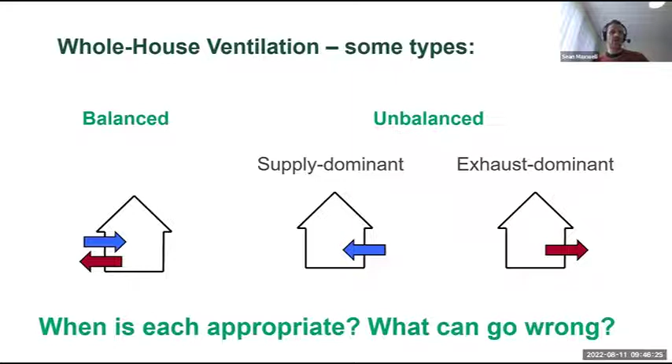Where is each of these best used, and what can go wrong with them? Balanced ventilation has the highest first cost because it has two sets of fans and two sets of ductwork for intake and exhaust. It has higher maintenance costs because it needs filters. It's really only best used for energy savings in tighter homes, and it's becoming basically standard practice in a lot of the developed world. British Columbia and Canada require this in the building code—a balanced ventilation system with heat recovery. It'll be standard here someday, but you really only start to realize the energy savings from it, because it has a heat recovery core, when you start building very tight homes.

So all that being said, it has absolutely the best indoor air quality because it ducts fresh air everywhere people actually live—to the bedrooms—so people are breathing fresh, filtered, tempered air. It's quite comfortable, better air quality. That's the best in terms of air quality, absolutely.

Supply dominant ventilation systems, I'd say for Victoria, aren't really typical. For humid climates, a constant dehumidifier is a great idea, but I'll probably leave that one because we don't see that in Victoria much.

Exhaust dominant ventilation systems—this is how most of the US complies with the building code. They're required to build tight and required to have some ventilation system, so it's very cheap because they're already required to have a bath fan, for example. Very low running cost—like this Panasonic fan uses 8 watts, less than a light bulb. Very low maintenance cost because there are no filters to change; if dust passes through, it just pushes the dust outside. So it's a very basic measure to reduce condensation risk.

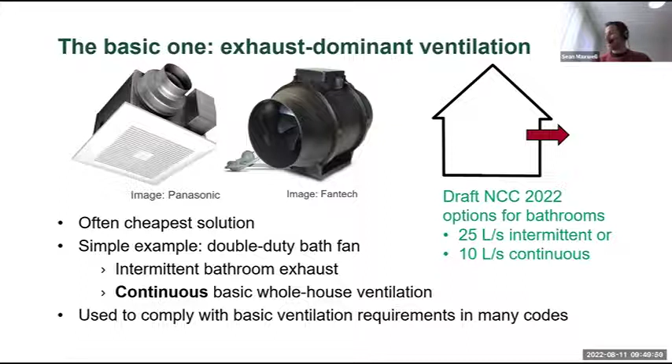So why does it work? Are we going to suffocate if it's only pulling air out? Where does the makeup air come from? Well, it comes from things like gaps.

This is right under my desk here, this power point. Our apartment—remember I said there's not much difference in terms of build quality and design between this apartment and the one that was built 100 years ago in Bondi. Same climate. Why do we have condensation there but no condensation here?

To me, it's pretty obvious. You might say, oh, maybe the one you have now has lots of fresh air, you might call it fresh air or ventilation. The airtightness of the one in Bondi was a permeability of 18. The permeability of this one is 2.7, so many times more airtight.

Why are we not getting condensation here? It's because the building has continuous ventilation drawing air from the bathrooms and the laundry room, and that's removing all the humidity from where it's being generated. That's why we don't have condensation here.

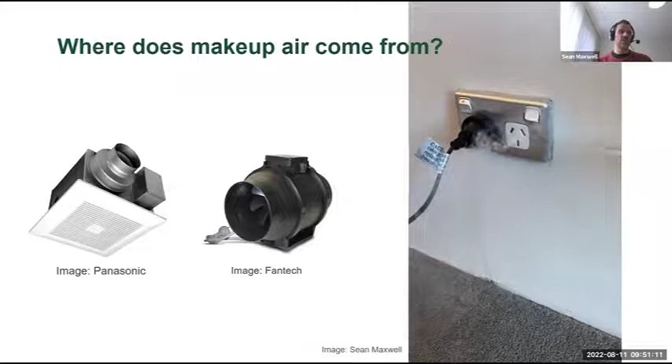It's a cheap and simple continuously running bath fan. That's why I'm going to be one of the ones signing on for a proposal for change to make continuous ventilation required eventually in Australia.

So remember, you've got to use a draft stopper on your bath fan, because that's required by building code, and you can't duct it into a roof space under NCC 2022. It's got to be ducted to the outside, because you don't want to be dumping moisture into a cold roof space where it can cause problems. Those are just some basics here.

So just a question for you: what do you think? Is adding basic ventilation to a house easy or hard? 1 is really hard, 5 is really easy. What do you think? Did I sell you?

All right, as I was expecting, we got some people who say, Sean, I won't give you the pleasure of thinking it's too easy. I'd like to hear some of the reasons why you don't think it would be easy to add, if all you're talking about in Victoria is a continuous bath fan. I would like to know.

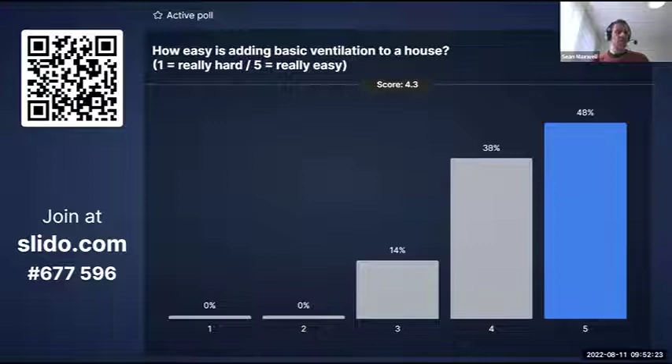Okay, so very cool—keep replying, but I will move on. So most of you think it's not that hard, and I would be with you. So in summary, we don't need to go over the summary. I'll just cut to the question and answer period because we're over time.

What does the anonymous attendee say? What are the environmental impacts or embodied energy levels or health hazards of using spray foam throughout your sealed home? So it's very common to use spray foam in the walls of buildings in the US, and it does go through a reaction. In fact, it makes nasty chemicals when it's installed.

So the people who install it have to wear protective suits, and you need to ventilate it afterwards. But pretty quickly, within a day or two of airing out, those chemicals are gone, and this is just shown by indoor air quality monitoring.

If you don't like the idea, there's plenty of other options, plenty of ways to do it. So what about a bathroom fan that won't suck the steam, only sucks the air?

I am not sure about that, because steam is condensed water vapor, and air includes water vapor as well. So air as a general term means like 78% nitrogen, 21% oxygen, and about 1% water vapor. So if it's taking the air, it's taking the water too.